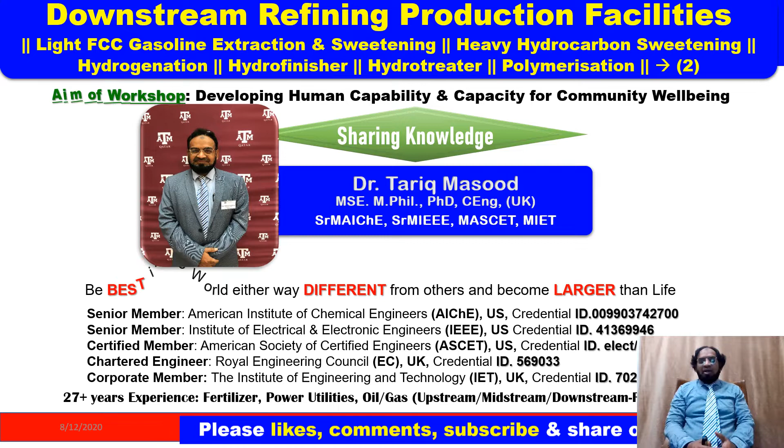Lecture number 2. Before my lecture, I used to read the Quranic verse, Qala Rabbi Shrah li Sadri wa Yassir li Amri Wahlul Uqdatam min Lisani Yafqahu Qawli Allahumma Rabbi Zidni Ilma. O my Lord, open my chest and ease my task for me and loose a knot from my tongue that they may understand my saying. Allahumma Rabbi Zidni Ilma. O Allah, advance me in my knowledge and true understanding.

Okay, my future plan is to discuss 6 topics related to refining facilities. We are still working on light hydrocarbon, a sweetening Merox unit. The next topic will be sweetening liquid petroleum gas, LPG Merox. Then we'll discuss fundamental principles of LPG hydrogenation, then heavy hydrocarbon hydrofinisher.

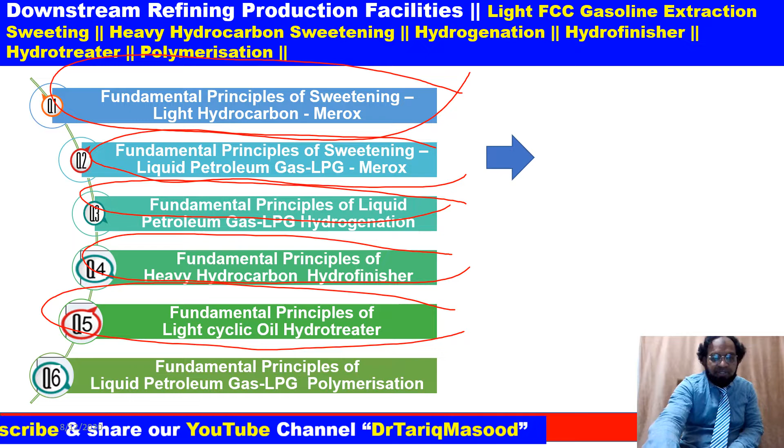Then the fundamental principles of light cycle oil hydrotreater. And number 6, we will discuss LPG polymerization. Those are the 6 topics we are going to discuss over the next couple of months; it could take maybe a year. Shaping clean and sustainable global energy, I plan to deliver more than 300 lectures over the next couple of years.

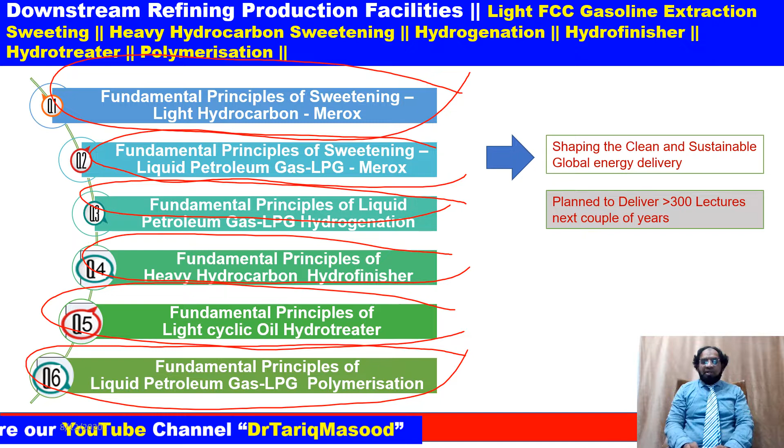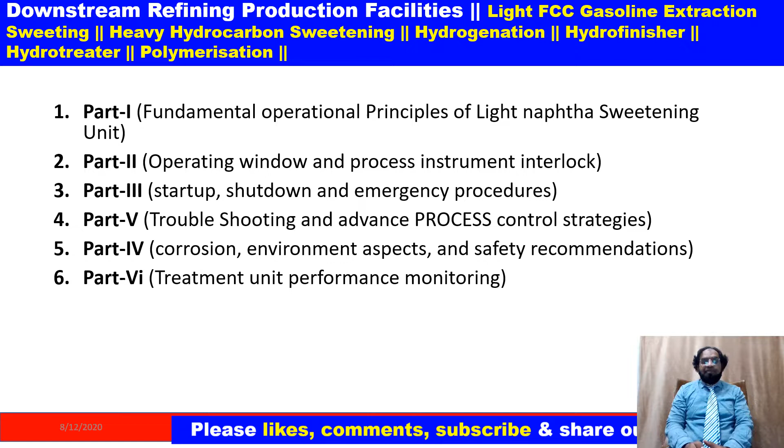Okay, so we are discussing the light naphtha sweetening principle. In part 2, we plan to cover operating windows, process, instruments, interlocks, startup, shutdown, troubleshooting, corrosion and treatment, and performance monitoring, etc. Refining production facility, FCC gasoline extraction and sweetening process flow descriptions, lecture number 2.

Okay, key takeaway points, lecture number 2, downstream refining production facilities: extraction section, reactor and regeneration section we are going to discuss today. Process flow descriptions. As you know, the sweetening unit has 3 main sections. First is the extraction section. Caustic soluble mercaptans are mostly extracted from the gasoline.

Number 2, reactor section. Remaining mercaptans are converted into disulfides by catalytic oxidation in the alkaline environment. Caustic regeneration section: extracted mercaptans are converted to disulfide oil. Basically, light FCC gasoline sweetening, or gasoline mercaptan oxidation, is a UOP trademark. It consists of extraction, reactor and regeneration sections.

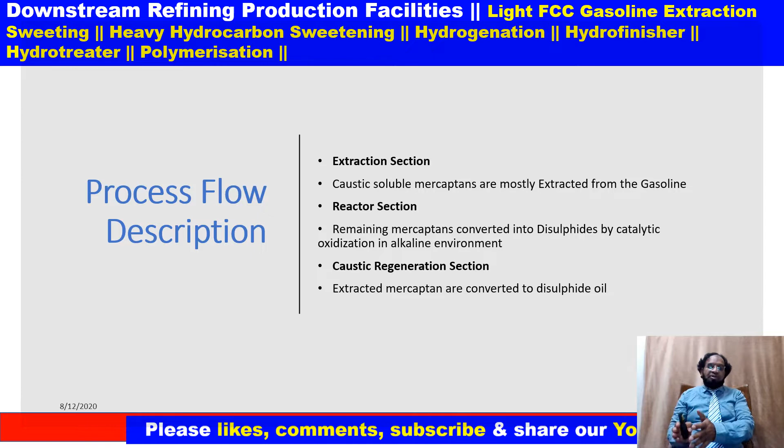Okay, from my next slide, I'm going to explain the extraction, reactor and regeneration, how it happens, in an artificial simulated model. Light naphtha treatment artificial simulated model. Yesterday we discussed only the startup procedure. Today we are going to discuss its complete extraction section, reactor section, and regeneration section. This is my feed composition, and after processing I'm getting a very good product as guaranteed.

So first I run the model, step 1, step 2, step 3, step 4, step 5, 6, 7, and step 8. I will hide my product, and then I'll bring up my operating parameters. Now, light gasoline from the gas concentration section of the FCC unit is first routed to the extractor. The mercaptans present in the light FCC gasoline have a low molecular weight and are readily soluble in caustic soda solution. For this reason, the gasoline is brought in contact with caustic soda solution in an extractor.

The extractor is equipped with 8 trays. Regenerated caustic is fed on flow control to the top of the extractor, while gasoline is fed to the bottom of the extractor. The spent caustic is discharged from the bottom of the extractor as a function of level in the disulfide separator and transferred to the caustic regeneration section. Okay, this is my extractor section. Now I'm going to discuss my reactor section.

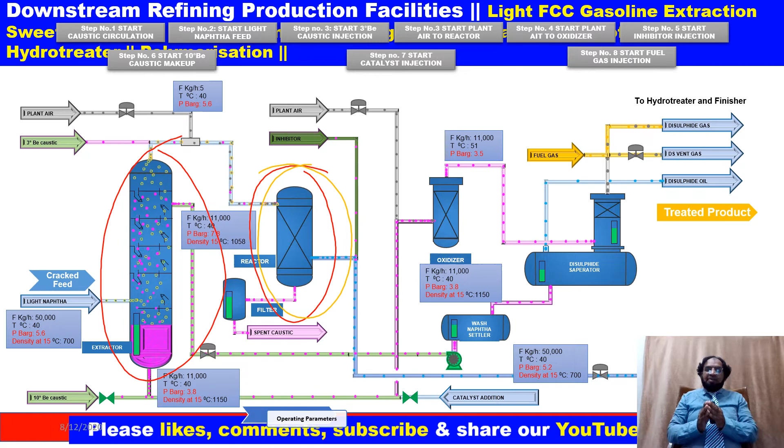Continuous injection of dilute caustic is required to maintain a minimum level of alkalinity in the reactor. Then air is added through the FCV flow control valve to the gasoline stream via an air mixer, ensuring consistent dissolution of air in the gasoline just before entering the reactor. This air injection line is provided with a shutoff valve which cuts off the air flow on low gasoline flow rate.

An excess amount of air injection for a given feed rate can cause the formation of a separate air phase at the top of the reactor, which will promote channeling in the catalyst bed. The mixture of gasoline, air, and soda solution is evenly distributed on top of the active charcoal bed and then runs through the reactor. The spent sodium hydroxide solution is led via the bottom nozzle of the reactor to the drain pot, where the remainders of entrained gasoline are separated. Then the spent caustic is discharged through level control to the spent caustic degasser drum.

The gasoline leaves the reactor as a separate stream at the bottom of the catalyst bed after inhibitor injection, which is provided by the UOP inhibitor. The gasoline is exported via pressure control through the PCV to maintain a certain pressure. During operation, the catalyst is losing its activity and needs reactivation.

The catalyst will be reactivated: acetone washing of the activated charcoal is the first step, and the second is re-impregnation with Merox catalyst. So different equipment will be provided for catalyst washing, re-impregnation, and circulation, such as a pump and ejectors. We'll further discuss this equipment in a special procedure, or we will have another lecture.

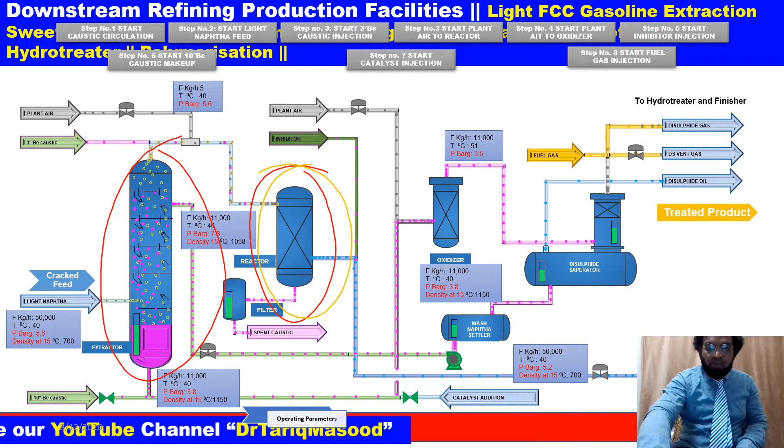Now we are going to discuss the caustic regeneration section. This is the complete regeneration section. The mercaptan-loaded caustic from the bottom of the extractor flows via the caustic heater to the oxidizers. Before entering the oxidizers, it is mixed with the rich caustic. The Merox catalyst from the catalyst addition is periodically added to the caustic to maintain steady caustic activity. For oxidation, air is needed, which is added via flow control to the caustic catalyst mixture.

To promote separation of the caustic and disulfides, wash naphtha is injected into the mixture of caustic with catalyst and air upstream of the oxidizers. This mixture passes through the oxidizers from bottom to top, while the mercaptans polluting the caustic are converted to disulfides. After leaving the top of the oxidizers, they stream into the dome of the disulfide separator, where the gas and liquid phases are separated into off-gas, disulfide oil and wash naphtha, and caustic.

The off-gas leaving the disulfide separator dome is routed via pressure control through the PCV to the heaters in the heavy FCC gasoline hydrofinisher and/or the LCO hydrotreater. In case of failure of the other unit, the off-gas is routed to the vent duct, where it is discharged via an exhaust head to atmosphere at a safe location. During normal operation, the off-gas route is set by the operator using a selector switch. Different routes can be chosen. Fuel gas is added via flow control to the off-gas for purging and reducing the oxygen content to stay below the explosive limit.

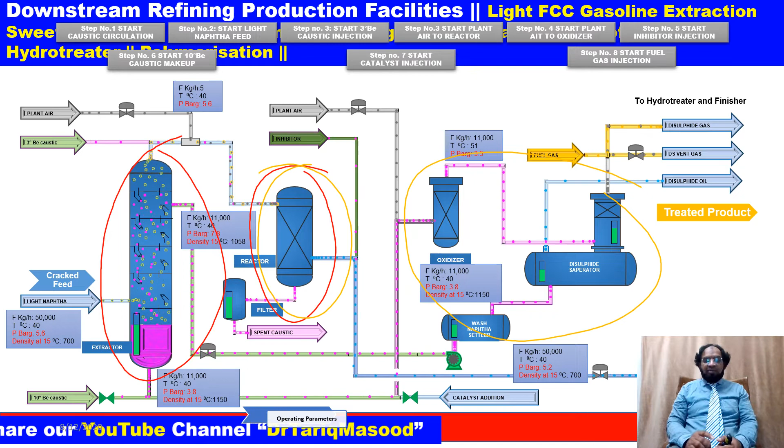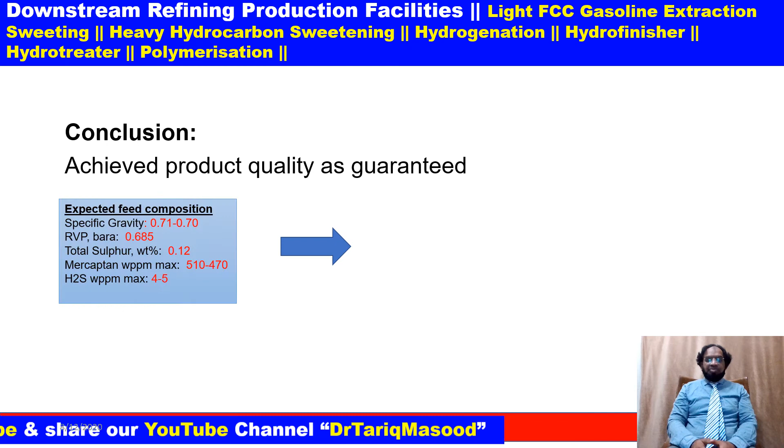Conclusion: achieved product quality as guaranteed. First, you can see here this is my expected feed to the sweetening unit, and after that, this is my product after processing. So thank you very much for your patience and time.

This was my next topic: unit design basis, theoretical description of the process, and material and heat balance.